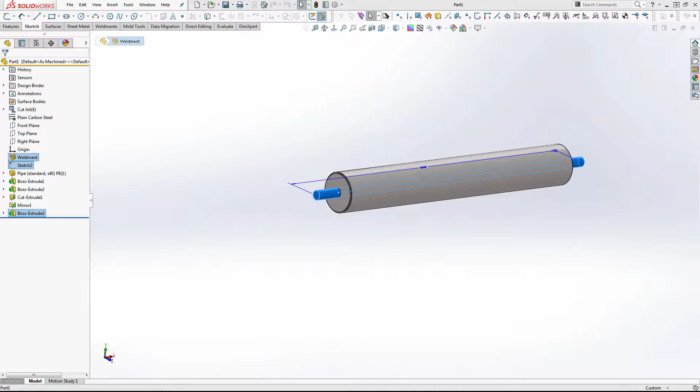And all my pop-ups pop up on my 4K because I normally use that. So what we'll do is, this is going to be 1045. Let's see, 1045 cold drawn steel.

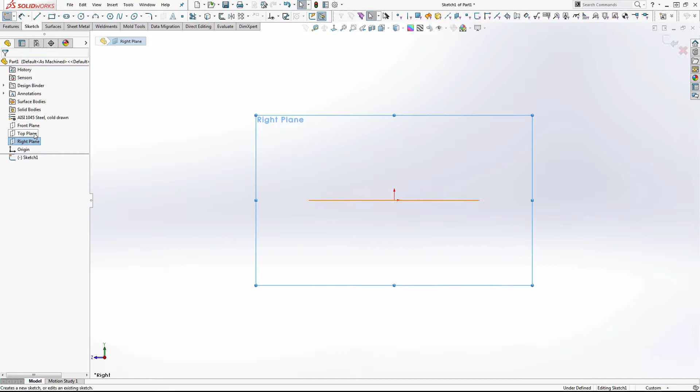Okay, and I'm going to draw it on the right plane, and it has a keyway, so we'll start with the circle. And I'm not going to put the keyway in the sketch. For certain reasons, in this case, I don't believe it would be good practice to put the keyway in the sketch, so I won't be doing that.

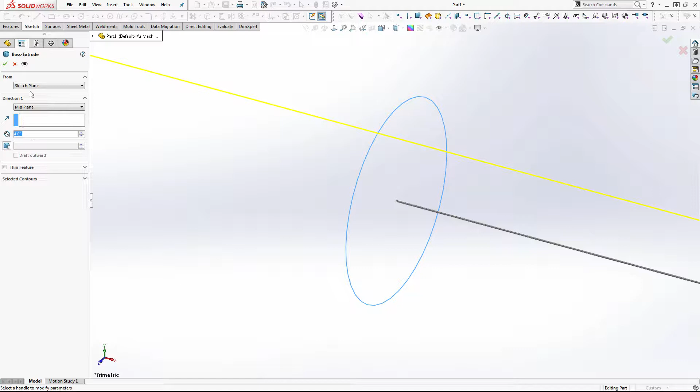We'll do mid plane at 48 inches, and we'll be done with that. And then we'll go ahead and put our keyway in. Right plane sketch. And we'll drop our keyway in here.

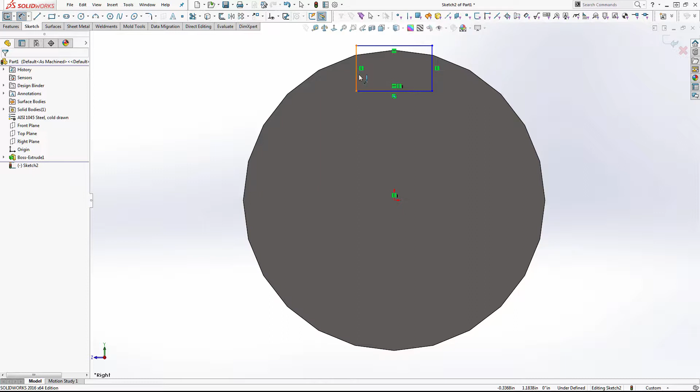Now it says the keyway is - let's see, if you guys don't know this trick, if you right click on the line and say select midpoint and then your origin, you can choose vertical and it'll center it. It says the keyway is 1/4 by 1/8, so I'm thinking that it's 1/4 this way, and I'm thinking that it's 1/8 this direction.

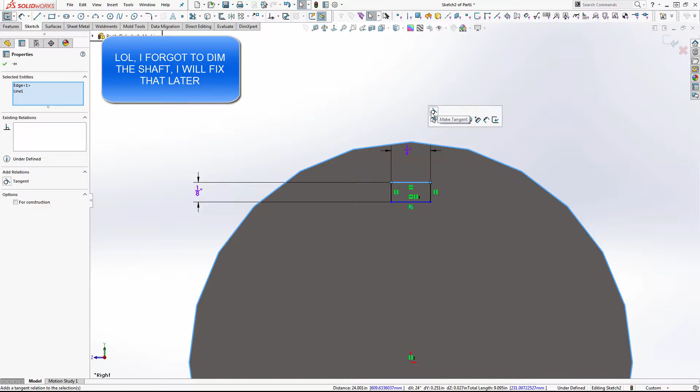125, and I'm going to have to verify that when I get it out of the box, but for now we'll set this tangent and make sure these are where they need to be, and then we'll cut extrude through both directions. And we're done. So this is our shaft.

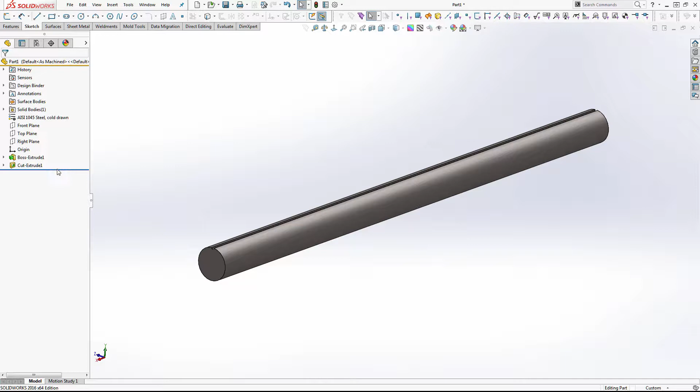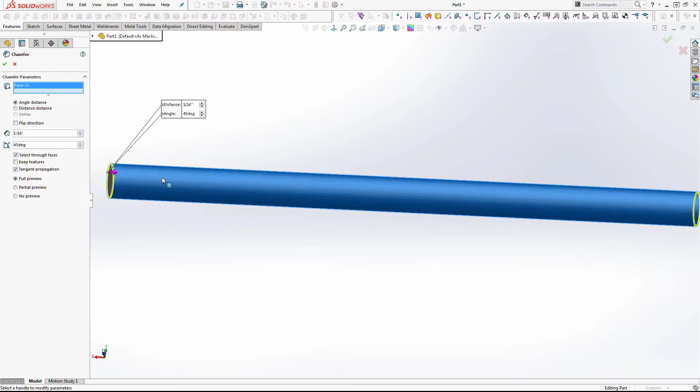I'm sure it's chamfered on one end, so we'll roll that keyway back here real quick, and we'll chamfer it. Oh gosh, I bet you it's a 3/16th. Again, I'll just rough this out. Actually, can I get a - what if I pick here? Does it do both? Huh, okay. So then we'll put our cut extrude back in there, and we'll save this as...

What am I going to do this as? Do I have a folder in here? Nope. Just name this shaft 1-inch shaft. 1-inch shaft. We'll do it military style. Shaft 1-inch.

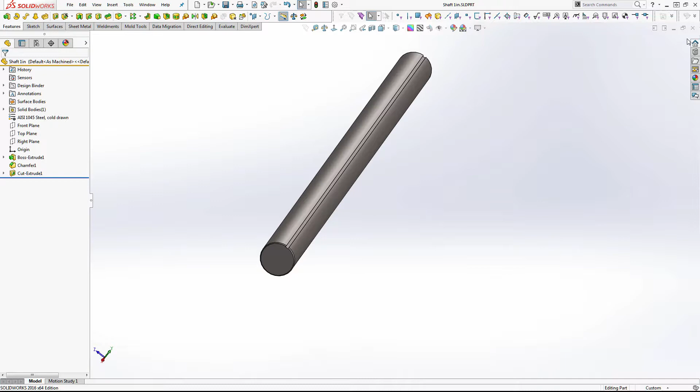Alrighty, now I also bought collars, and I'm looking at my Amazon orders here. I bought collars and pillow block bearings. Do I have - I'm not going to have drawings for those, am I?

Alright guys, I'm going to jump on McMaster-Carr here real quick. I think what I'll do is drag this over so you guys can see what I'm doing. So we'll go to McMaster and we'll say pillow blocks.

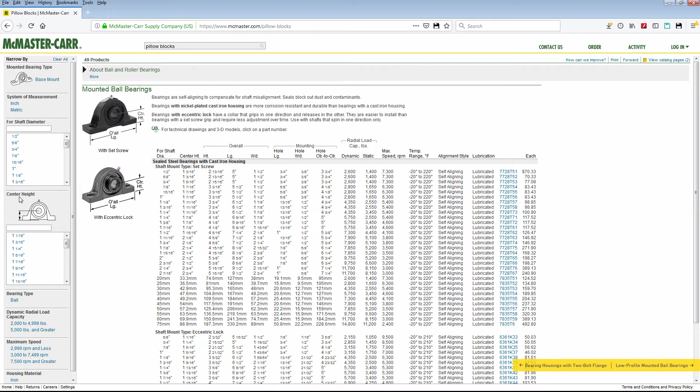I've just got the plain old ones. Shaft diameter 1-inch, eccentric lock, set screw - I think it's a set screw, so we'll check this one and see if it's got a drawing. Hey, I have a drawing.

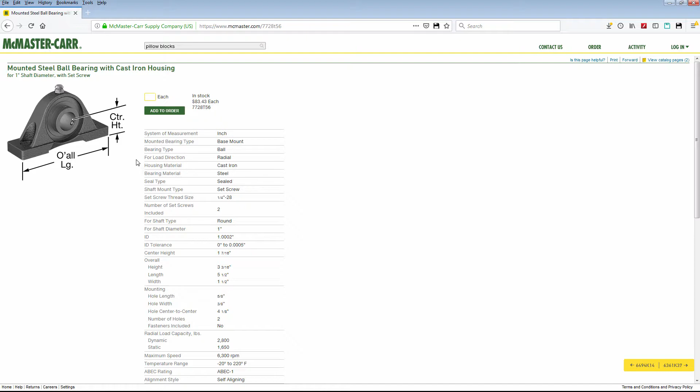Hallelujah. The ones I bought are different looking, but it probably doesn't matter. Oh man, yeah, these are a set screw, but they stick out like that. Okay, let's check this one. Oh yeah, that's much more like it.

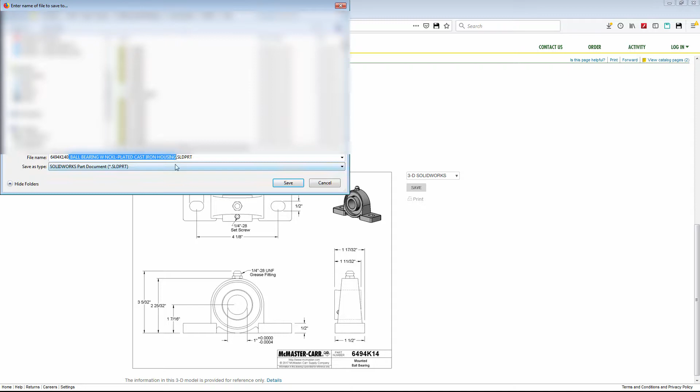So this is basically the same thing, so I'll just save this straight off of McMaster. How about we just use the number? Oh no, what we can say is - no, just going to use the McMaster number.

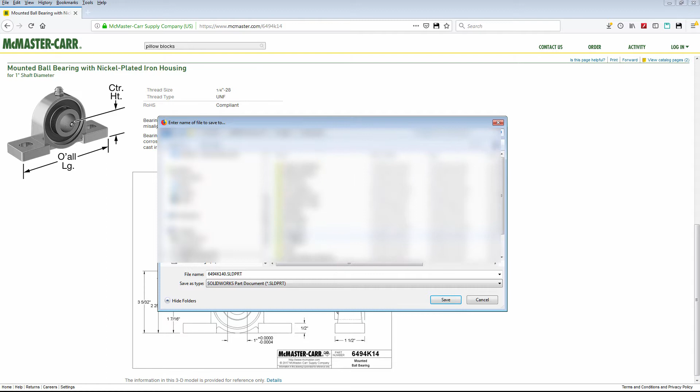It takes me a little bit to navigate around because I got so many projects. Let's see, so we got that done, and then the collar clamps. Let me see if I can get those off McMaster. Bored solid steel, they got a set screw in the middle of them. So let's see - you know, what you want to do when you're designing stuff, obviously, is cut down on your design time.

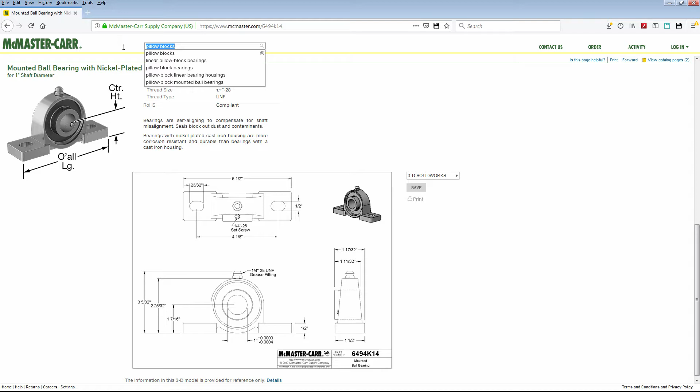Collars. There we go, shaft collars. They're one piece. Yep. They do not look like that. They are like these, I believe.

1-inch. I think they're zinc plated steel ones. Yep, that's pretty much what they look like. Only they're a little cheaper, they're Chinese ones. Yeah, we're just going to use the McMaster number.

And then what I have to decide on, guys, is how I'm going to, what kind of pulleys I'm going to use. Let's see, pulley - I don't know, like 4-groove, something that's adjustable. Let's see, step pulley - okay, that's what we want. Step pulley. Alright, we got Amazon Choice here.

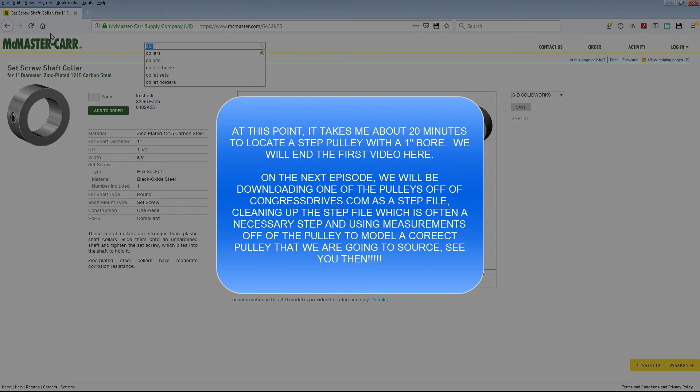Let's check McMaster. Boy, they go up to 3/4. I'm gonna have to drill it out.